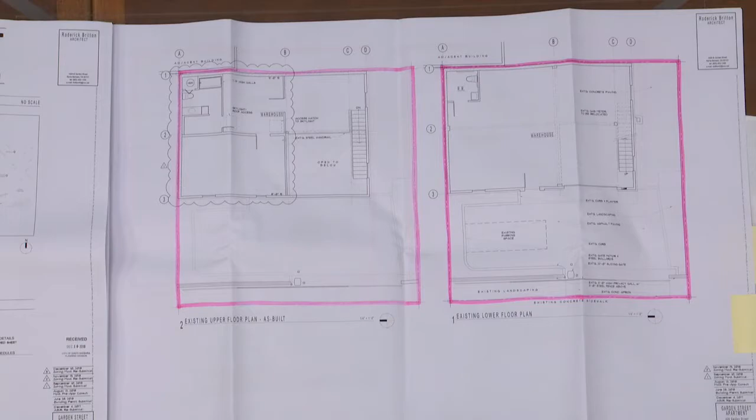And so the proposed project, thank you. The proposed project is to legalize that conversion of the second floor to a residential unit.

Also, some site improvements are proposed, such as a new trash enclosure over in the back here, uncovered bike parking, as well as constructing a carport to serve as the warehouse parking. On top of that carport would be the deck serving the residential unit and serving as the open yard for that unit. And a portion of the warehouse would be converted to a garage for the residential unit.

The Architectural Board of Review did review this project on November 6th of 2017 and approved it. The applicant then submitted for a building permit, and it was discovered during the building permit process that the project requires a modification because open yard in a mixed-use development like this is supposed to be on the ground level or on a deck no more than 3 feet in height. This proposed open yard is, again, on top of a carport.

So there are a couple of changes that have occurred since the design review approval, and those came from building permit plan check comments, such as the ADA striping over here. However, those kinds of changes are eligible for an administrative staff level review, so it's not anticipated that the project would need to go back to the actual ABR full board or consent board.

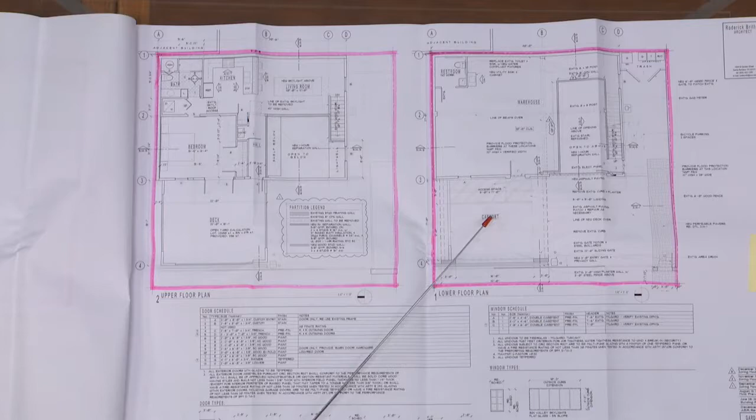The deck is also a logical placement for the open yard. In this case, it opens directly from the bedroom of this 1-bedroom unit, rather than being on the ground floor, which is taken up by the warehouse parking and site improvements like the bike parking and trash enclosure. The carport and the deck above it is also as far away as possible from a neighboring residence on this lot, so staff does not anticipate any kind of privacy impacts.

The project is in the demolition review study area, so the urban historian reviewed it and confirmed that this existing building and landscaping is not a historic resource, and the proposed project would not cause any impacts to any other historic resources in the area.

The project is Tier 2 in terms of stormwater management, and finally, staff has received no inquiries about the project from the public via emails, letters, phone calls, or visitors to the public counter.

Okay, great. And I assume, since you indicated it went through plan check and modifications were needed, that transportation planning has reviewed this in terms of maneuverability and backing out. Multiple times, okay, because Garden Street is extremely busy. It's designated as a minor arterial.

And with the gate, I know it's an existing situation, they're changing the use now, but with the gate and people stopping to wait for it to open, that's all. Transportation has looked at this several times. Originally there were two parking spaces proposed here, then they changed the design to accommodate ADA parking for the warehouse and moved the residential space into here. Transportation has looked at this several times with each iteration and confirmed that this proposal is adequate.

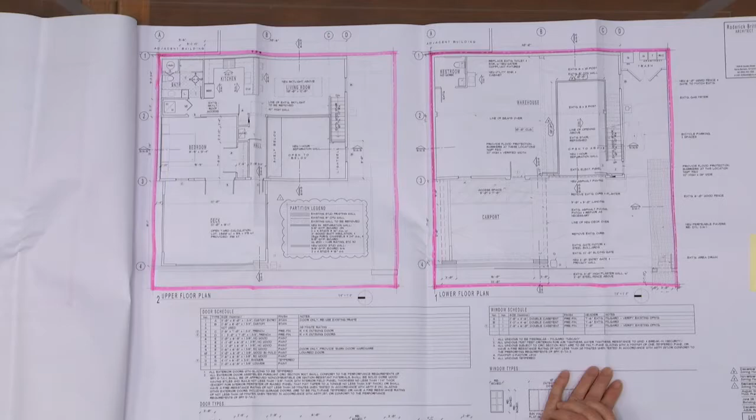Okay, and then if I understand this staff report right, it was a little confusing, but the parking requirement is only one space for the residential unit, when usually it's two spaces, because the floor area associated with the residential use is less than 50% of the total floor area of the building versus just the warehouse use, correct? That is correct. Okay, all right, thank you.

Would you like to state your name for the record and provide additional comments? Sure, my name is Rod Britton. I'm the architect for the owners.

And just to go back to transportation, the gate has to remain open during business hours. So that was one of the comments from transportation, so the gate will not be an issue during working hours, I guess.

Which is what? Well, it's actually a private warehouse, so it will be 8 to 5, I guess. He's just storing stuff in there. Okay, so 8 to 5, Monday through Friday? Yes.

And then you've gone over with them the maneuverability? Yeah, we can back out and get in and out of the parking lot, so.

Okay, would you like to provide any additional comments regarding the open yard area? Stephanie did provide some insight, but in terms of your design thoughts on the location, like I said, Garden Street is a really busy street, and so there's noise, there's potential air quality concerns, what's the usability of that?

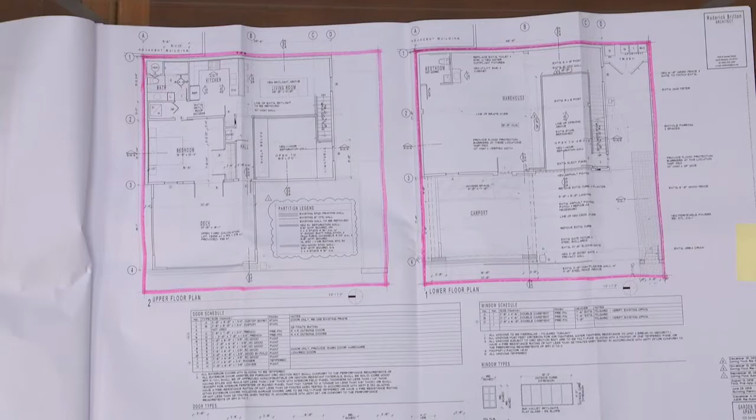It's only 10 feet wide, right? Well, it's almost less, based on the scale, it's about 9, maybe 9.5, by the time you get the fence in there and all that. So it doesn't meet the 10-foot minimum dimension, and it's not really usable because it's on the first floor. You'd have to go down and out and stuff.

So if you wanted to use the outdoor area and have dinner or whatever outside, it is an appropriate spot, and future tenants would be aware of the inconveniences. And like I said, it is below our thresholds, so it is something that is supportable.

But I do have concerns about that gate, so I will put a condition on the project that requires that gate to be open during working hours, the big gate, yes, that it remain open so as to minimize the impacts to Garden Street.

Right, it actually might be on the site plan right now. I've got several sets of drawings going. Are you talking about... can I talk now, or am I not allowed to talk yet? Nope, go ahead. You can respond to that because it would be a condition, so I'd like to hear what you say.

So you're talking about the car gate, correct, not the walk gate. Right, so then the walk gate would be closed, but the car gate would be open during business days, business hours, it'll have to be unlocked. Unlocked or open? Oh, open. So it has to be open all the time.

The concern being is potential traffic impacts or conflicts on Garden Street. And this would be something that the tenant would have to be aware of because they'd be down there every day.

It could be on your lease, part of the lease that they would be aware of it. And yes, as a property owner, you would be required to inform them, because if it wasn't, then the violation would be towards you as the property owner.

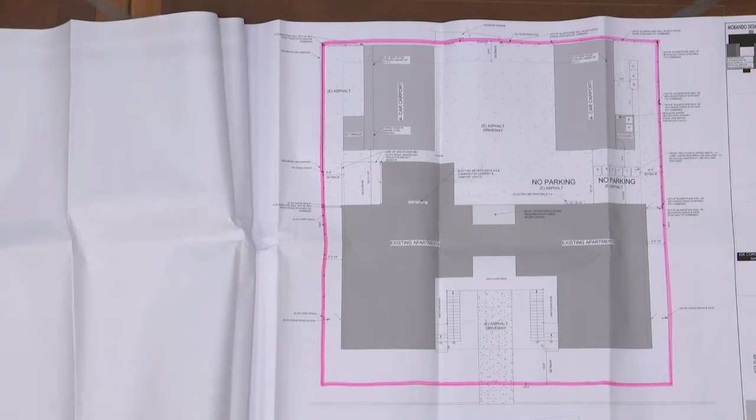In 1961, the city approved a room addition for apartment 4, and that addition also included a covered porch. Again, at the time there were no requirements for something like a lot area mod because 8 units was allowed.

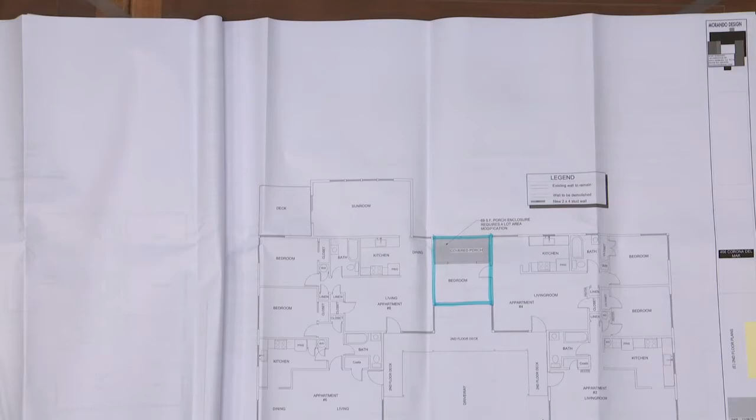If we can now flip to the proposed, to the next page. What happened was at some point in time, that covered porch became part of this bedroom, and that constitutes new floor area. There is no permit on file showing the use of that enclosed porch as habitable floor area for that bedroom, so now we're here to legalize it as habitable floor area.

Since it's non-conforming to density, any addition of habitable floor area does require a lot area modification. The project is in the non-appealable jurisdiction of the coastal zone overlay and is eligible for a coastal exemption that the applicant can apply for during the building permit plan check process.

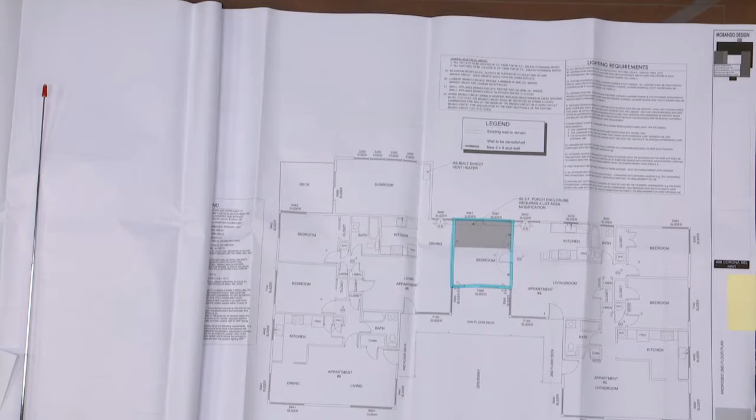In terms of existing building and zoning violations, ENF 2016-01838 lists numerous building violations related to things like electrical issues and maintenance issues. This project would abate all of those violations. During the staff site visit, I noticed some parking in unauthorized areas, so the applicant has also proposed stenciling indicating no parking in this area to abate that violation.

The ABR reviewed this project on May 22nd of 2017 and approved it, and as mentioned before, during the building permit plan check process we realized this project did actually require a lot area modification. The stenciling, and also an as-built fence for one of the units beneath this sunroom, has been noted since that ABR approval, and those things are eligible for an administrative review. So it's not expected that this project will return to the ABR on either the full or consent agendas—it's just a staff-level administrative review.

Staff is supportive of this lot area modification, given that the proposed as-built configuration has no change to the actual building footprint, as the enclosed porch was already approved by the city. There are no privacy impacts anticipated due to this addition because these windows look out over the parking area and those detached carports. The use of this porch also makes this bedroom a bit more functional—originally a long rectilinear room, now more square and easy to fit furniture in.

The project is exempt from CEQA under categorical exemptions 15301, 15303, and 15305. The parcel is in an archaeologically sensitive area; however, the development is all on the second floor, so we did not require any technical reports for CEQA review in this case.

The project is Tier 2 in regards to stormwater management. Finally, staff has received no comments, questions, or inquiries via letters, emails, phone calls, or visitors coming to the public counter.

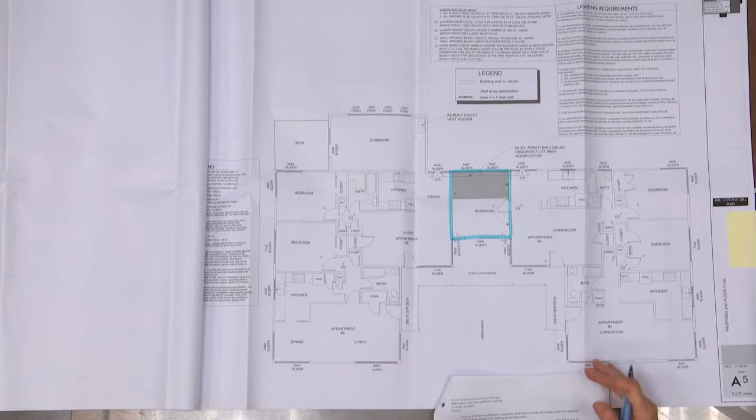Okay, great, thank you. I don't have any questions for you right now. You already stated your name, Mark—would you like to provide additional comments? Sure, well, she pretty much did a good job. She pretty much elucidated everything.

It was like two little 4-bedroom complexes, and then in '61 they filled in the area in between, which made a drive-through. So they filled in underneath, and then they extended the front porch. There were windows here originally, and on the back they had the balcony here with the wall at that point with a slider.

There was a bunch of other violations, basically electrical cords and the electrical meters at the back, which we did a single line diagram to show how they function.

And then Stephanie caught the little fence for this unit to create privacy on the lower floor that's underneath the sunroom here. We had that approved by staff, ABR admin, a few weeks ago around Christmas. So everything's approved, I just have to do the Tier 2.

The bedroom originally was like 8 feet on the inside, 8 feet 2, and then the 6 feet makes it like 14.2 by 12 feet. So it makes it definitely a more functional bedroom, and since it was already roofed, it's not adding any new floor area as far as density is concerned, it's just increasing the bedroom size, like she said.

So the original plan, this is the picture of the back of it. Was it an enclosed porch, or half wall, or did it have a wall with windows? It had a slider here. This is what it showed. It showed originally windows at the front, and then it had a slider here with this wall, and this was just pickets.

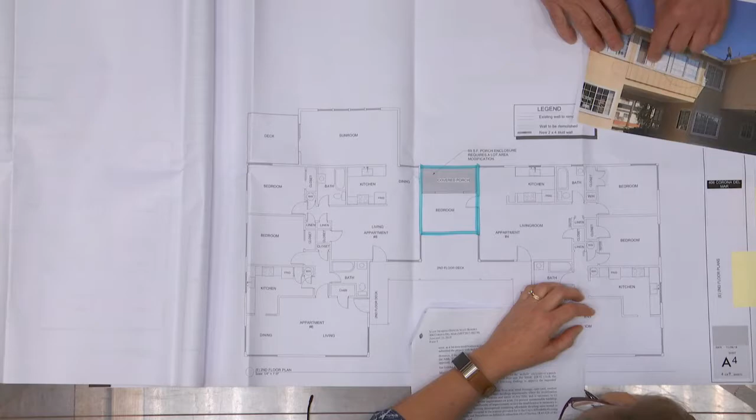Right along the back here was just pickets, with a handrail at 3 feet, typical back then. So was it enclosed? It was unenclosed but roofed.

When we did the structural on it, because we engineered the whole thing, it's built pretty shoddily. These 4x6s barely go over the plate, and there's just single floor joists going across, so there's no double floor joists anywhere, and there's nothing in the walls that showed there would have ever been a wall there. So it's interesting.

Okay, it's the 60s. All right, great, thank you. I don't have any further questions for you right now.

I'd like to open the public hearing, seeing no one in the audience. Have we received any comments? No? Okay, so I'll close the public hearing.

I did go out to the site and observe the same things you did, as someone was coming in and parked there - that tenant, conducive to their unit. So I observed the same thing.

But in terms of what your request is, the lot area modification pertains more to the density of the site. I understand the footprint's not increasing any, it's enclosing area that's already under the roof. That's all fine, the concern would be related to density. In your instance, you're not increasing the number of bedrooms, you're just enlarging one, so it doesn't affect the density for the site.

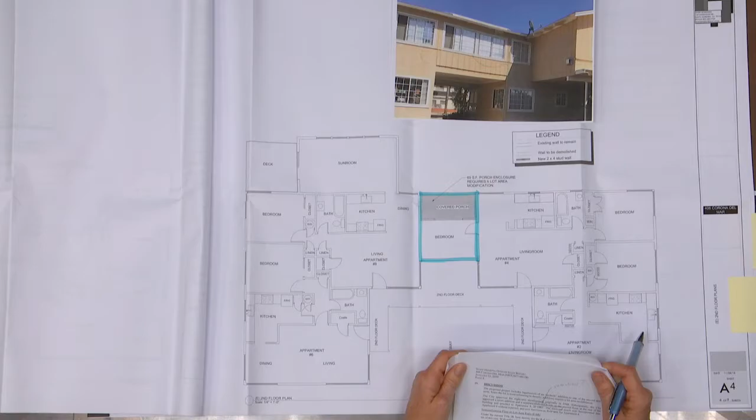So, like I said, it doesn't necessarily have to do with the lot area modification itself, but in terms of the front improvements, that's appropriate. Yeah, it's a cute little building, almost looks like an old hotel. Yeah, it's good looking compared to some of the other ones in the neighborhood. Fits the area, yeah.

Staff's not proposing any conditions, and I don't need to add any conditions. I would like to revise the findings slightly to reflect what I had said, and add that although it does create new floor area, it doesn't change the density of the site, it just makes an existing bedroom bigger. It does not increase the density or the overall number of bedrooms on the site, so just kind of reflect that part in the findings.

So with our revised finding, I can approve your project. My action is appealable to the Planning Commission within 10 calendar days, and they also have oversight authority of all my actions. If they felt this warranted additional discussion before them, they could call it up during that same 10-day review period, and if either of those would occur, Stephanie would contact you.

Okay, thank you very much. Sure, appreciate it. And I adjourn the meeting.